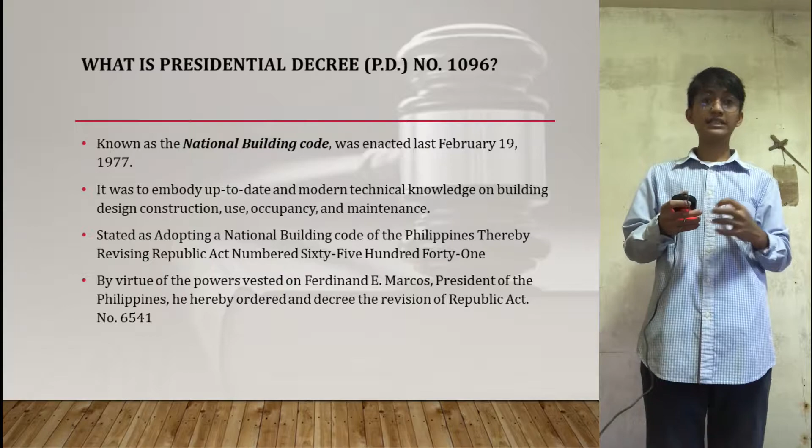So what do you think is the reason why he wants a revision of it? The following are the reasons. First, the country's accelerating economic and physical development, coupled with urbanization and population growth, makes it imperative to formulate and adopt a uniform building code which shall embody up-to-date and modern technical knowledge on building design, construction, use, occupancy, and maintenance.

President Ferdinand Marcos wanted a revision of it because he believed that modern technical knowledge of engineers should be applied in their designs, as we were experiencing urbanization and development.

Second, while there is Republic Act number 6541, entitled 'An Act to Ordain and Institute a National Building Code of the Philippines,' the same does not conform with the development goals and infrastructure programs of the government, and does not adequately provide for all the technological requirements of buildings and structures in terms of up-to-date design and construction standards and criteria.

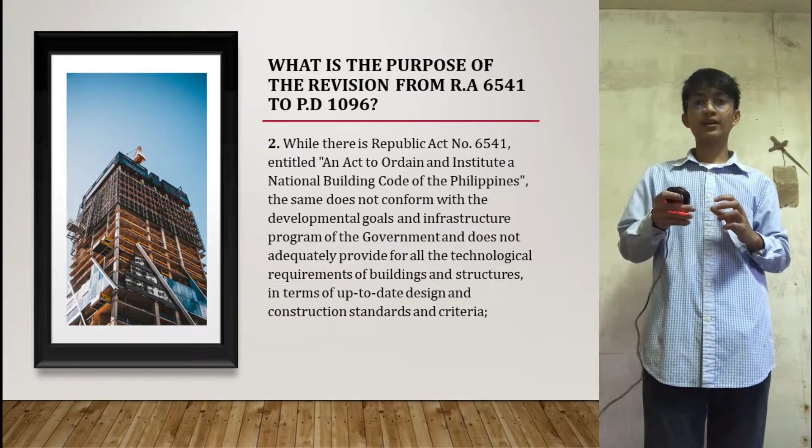This means Presidential Decree number 1096 contains updated and revised terms, considering the applicable advancements observed, to improve upon the previous act. So we should now use this revised version, which is PD number 1096.

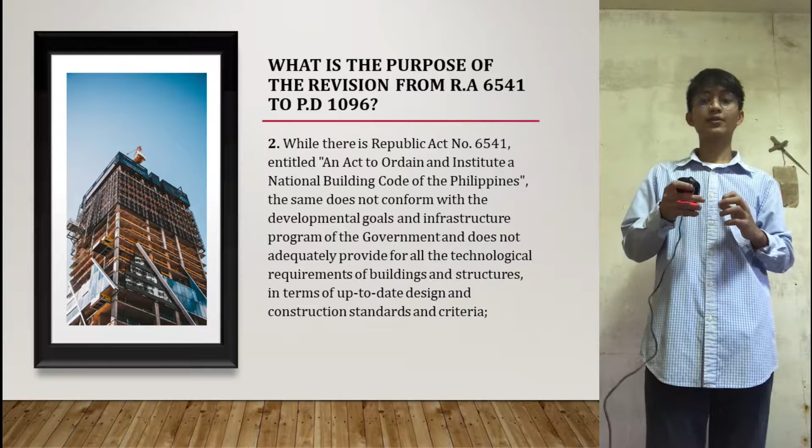Third, in the formulation of the new national building code, it is the desire and policy of the government to avail of and harness the technical expertise and professional know-how of men, not only in the public but in the private sectors as well. This means PD 1096 should be adopted by all professionals doing work related to building construction, both in government and private entities.

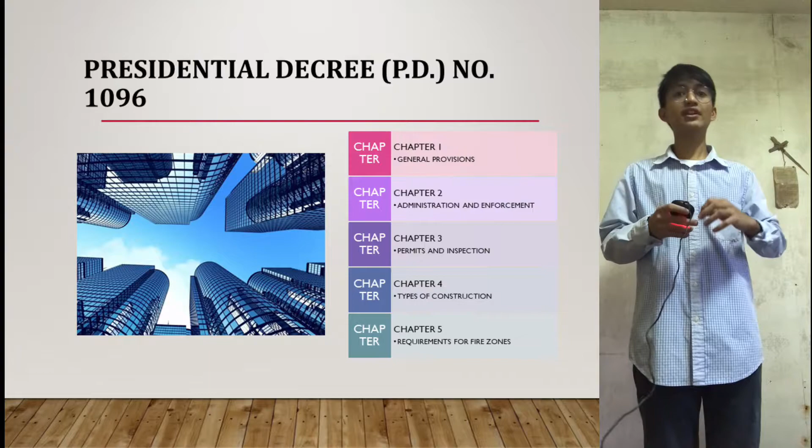Now let's talk about Presidential Decree number 1096, the 5 chapters. First, let's talk about Chapter 1, which is all about the general provisions.

In Section 101, the Title, this decree shall be known as the National Building Code of the Philippines and shall hereinafter be referred to as the Code. In Section 102, Declaration of Policy, it is hereby declared to be the policy of the State to safeguard life, health, property, and public welfare.

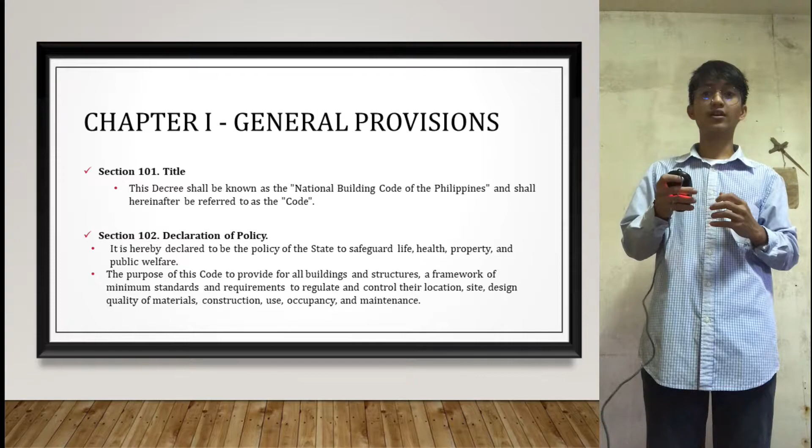The purpose of this code is to provide for all buildings and structures a framework of minimum standards and requirements to regulate and control their location, site, design, quality of materials, construction, use, occupancy, and maintenance. The implementation of this code is for the safety of anybody involved in the construction of a building. This law will monitor the safety of whatever construction is erected. We should always remember that safety should always be considered in construction. Section 103, Scope and Application.

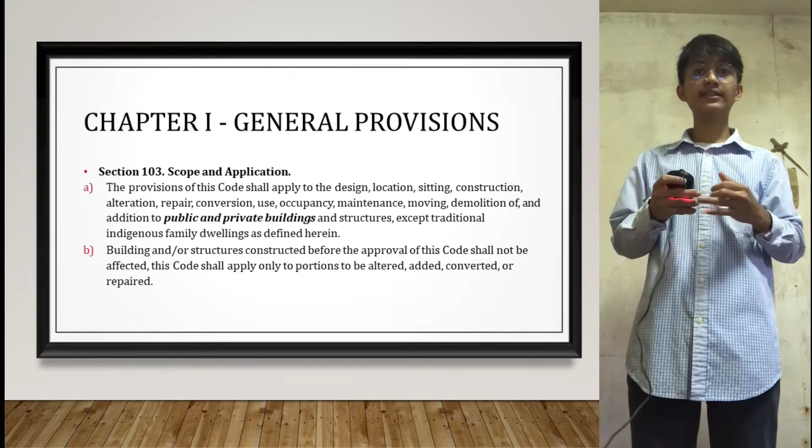So the provisions of this code shall apply to the design, location, siting, construction, alteration, repair, conversion, use, occupancy, maintenance, moving, and demolition of, and addition to public and private buildings and structures, except traditional indigenous family dwellings as defined here. So this law is involved not only in the design and construction of buildings, but also in repairs, demolition, maintenance, and more for both public and private buildings, except for indigenous family dwellings.

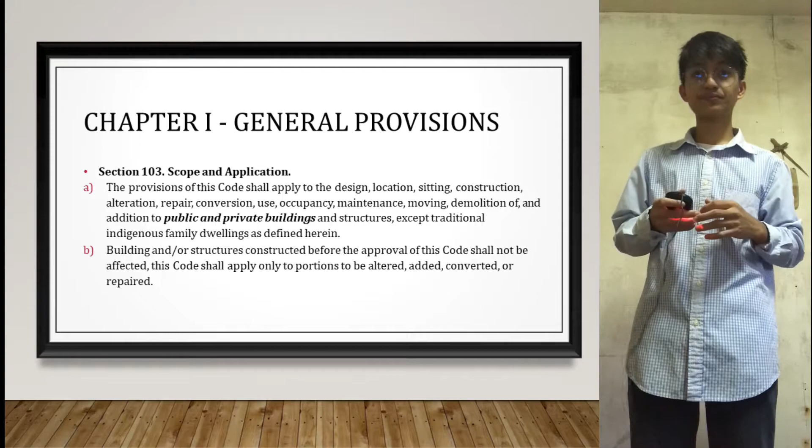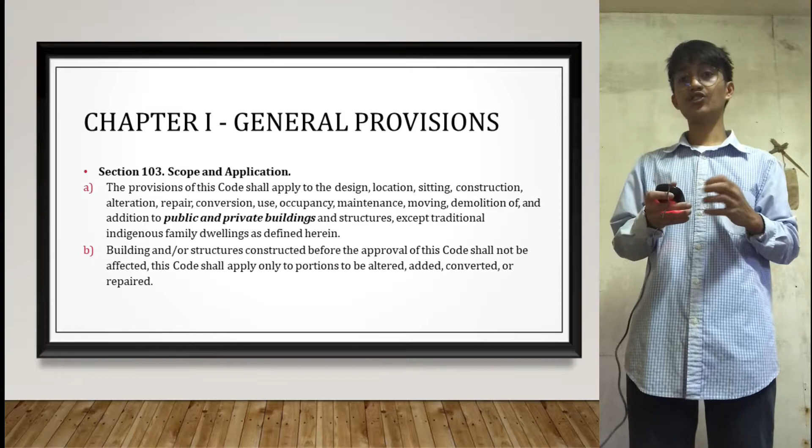Buildings and or structures constructed before the approval of the code shall not be affected. This code shall apply only to the portion to be altered, added, converted, or repaired. So buildings that are about to be constructed or repaired after the approval of this code are the only ones that could be affected, and existing buildings won't be affected. Section 104, the general building requirements.

First, all buildings or structures, as well as accessory facilities thereto, shall conform in all respects to the principles of safe construction and must be suited to the purpose for which they are designed. Next, buildings or structures intended to be used for the manufacture and or production of any kind of article or product shall observe adequate environmental safeguards. And lastly, buildings or structures and all parts thereof, as well as all facilities found therein, shall be maintained in safe, sanitary, and good working condition.

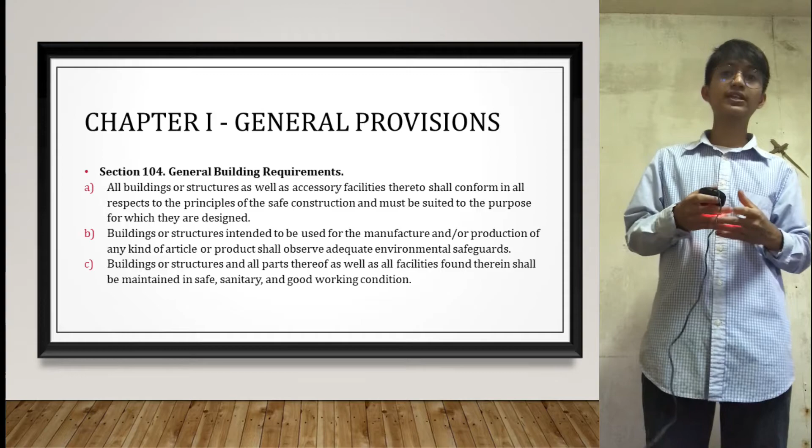So the main point here is to have safe construction of a building. It should have safe, sanitary, and good working condition.

Section 105, Site Requirements. The land or site upon which any building or structure will be constructed shall be sanitary, hygienic, and safe. So not only should the building be hygienic and safe, but also the land or site as well. In the case of sites or buildings intended for use as human habitation, the same shall be at a safe distance from streams or bodies of water or sources of air considered to be polluted. Examples of polluted places are near volcanoes and volcanic sites. Buildings should also be away from potential sources of fire or explosion, as it is not safe in these areas.

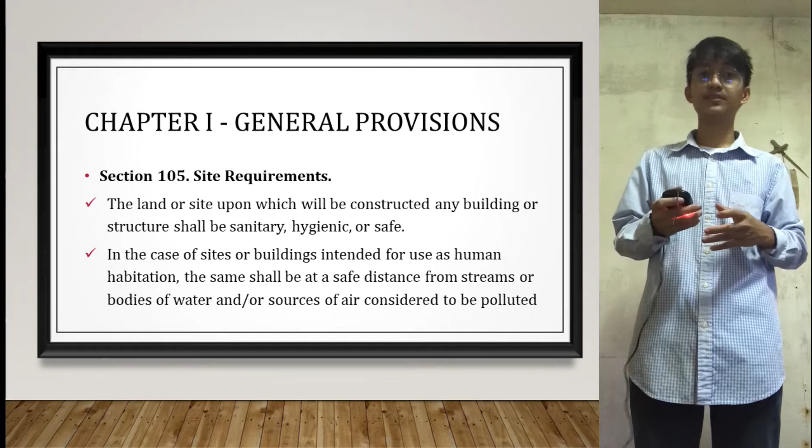Next is Section 106, which is the definition. As used in this code, the words, terms, and phrases enumerated in Annex A hereof shall have the meaning or definition correspondingly provided therein.

So we are done with Chapter 1. Let's proceed to Chapter 2, which is the administration and enforcement. Section 201, responsibility for administration and enforcement. The administration and enforcement of the provisions of this code, including the imposition of penalties for administrative violations thereof, is hereby vested in the Secretary of Public Works, Transportation, and Communication, hereinafter referred to as the Secretary.

Section 202, the technical staff. The Secretary is hereby authorized to constitute and provide in his department a professional staff composed of highly qualified architects, engineers, and technicians who possess diversified and professional experience in the field of building design and construction.

Section 203, the general powers and functions of the Secretary under this code. The Secretary shall exercise the following general powers and functions: First, to formulate policies, plans, standards, and guidelines on building design, construction, use, occupancy, and maintenance. Second, to issue and promulgate rules and regulations to implement the provisions of this code and ensure compliance with policies, plans, standards, and guidelines. Third, to evaluate, review, approve, or take final action on changes and or amendments to existing referral codes, as well as on the incorporation of other referral codes which are not yet expressly made part of this code.

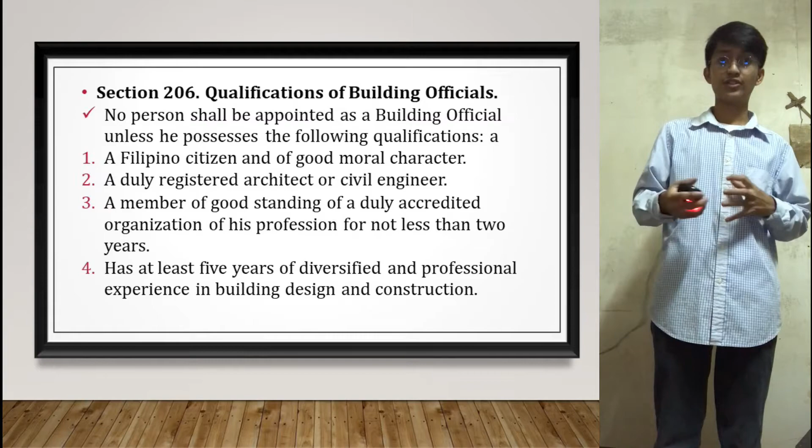Section 207, duties of building official. The building official shall be primarily responsible for the enforcement of the provisions of this code as well as the implementing rules and regulations issued. He is the official charged with the duty of issuing building permits.

So it is mentioned here, the building permit. Before you can construct a building, it should have a building permit.

If construction is started without a building permit, the building official will check your location or site and they will impose fines for not following the rules.

The building official may enter any building at all reasonable times to inspect and determine compliance with the requirements of this code and the terms and conditions provided for in the building permit as issued.

So even if the owner of the construction has a building permit, when the building official checks the construction for compliance and it fails, certain fines will also be expected.

When any building work is found to be contrary to the provisions of this code, the building official may order the work stopped.

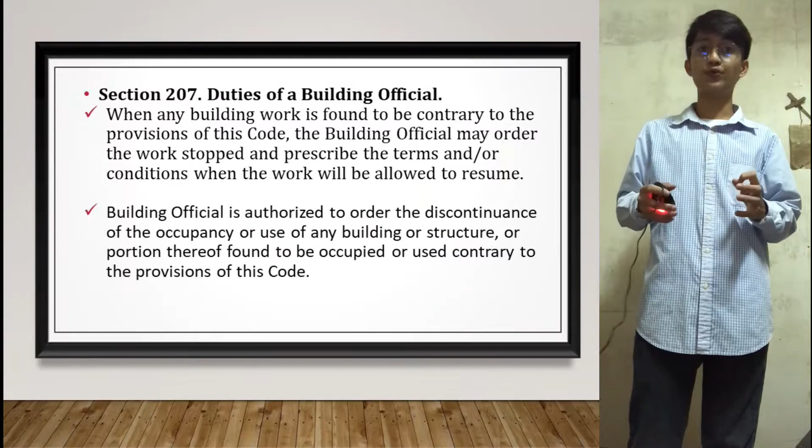The building official is authorized to order the discontinuance of the occupancy or use of any building or structure, or portion thereof, found to be occupied or used contrary to the provisions of this code.

So even if the building has been completed, after checking by the building official, if it is found that it doesn't follow what is stated in the building permit, then the building official has the right to stop

the owner of the building from using it until they comply with what is stated in the building permit.

Section 208 is all about fees. Every building official shall keep a permanent record and accurate account of all fees and other charges fixed and authorized by the secretary to be collected and received under this code.

Subject to existing budgetary, accounting, and auditing rules and regulations, the building official is hereby authorized to retain not more than 20% of his collection for the operating expenses of his office.

The remaining 80% shall be deposited with the provincial, city, or municipal treasurer and shall accrue to the general fund of the province, city, or municipality concerned.

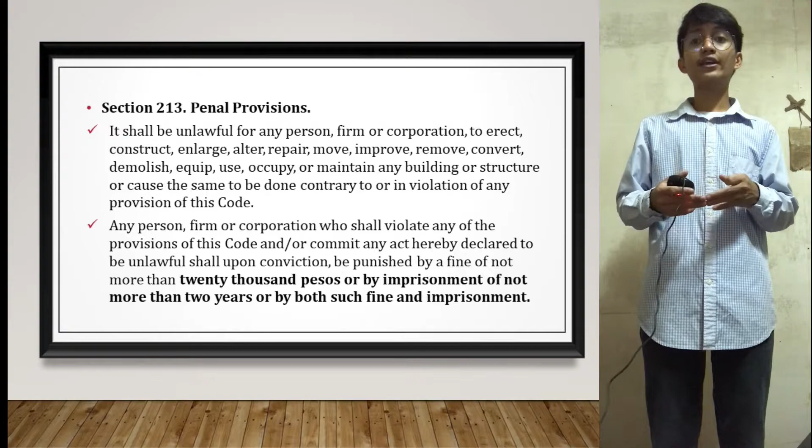Any person, firm, or corporation who shall violate any of the provisions of this code and/or commit any act hereby declared to be unlawful shall, upon conviction, be punished by a fine of not more than 20,000 pesos or by imprisonment of not more than 2 years or both such fine and imprisonment. So the owner of the building or the contractor should always follow the National Building Code of the Philippines. So if you don't want this to happen, let's take time to understand the National Building Code and let's apply it.

Section 214, dangerous and ruinous buildings or structures. So dangerous buildings are those which are herein declared as such or are structurally unsafe or not provided with safe egress or which constitute a fire hazard or are otherwise dangerous to human life. So if the building is not safe to use, then we can declare it as a dangerous building.

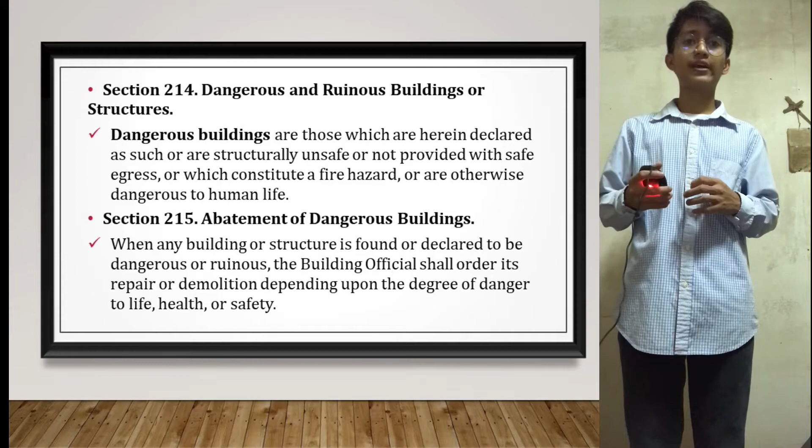So Section 215, abatement of dangerous buildings. When any building or structure is found or declared to be dangerous or ruinous, the building official shall order its repair or demolition depending upon the degree of danger to life, health, or safety. So they will first investigate the building, then they can decide what to do with the building. It's either they will just repair it or they will do a total demolition of it.

So, under Section 216, other remedies. The rights of action and remedies provided in this code shall be in addition to any and all other rights of action and remedies that may be available under existing laws.

So now let's proceed to Chapter 3, which talks about permits and inspection. So Section 301, building permits. No person, firm, or corporation, including any agency or instrumentality of the government, shall erect, construct, alter, repair, move, convert, or demolish any building or structure or cause the same to be done without first obtaining a building permit.

Like what I've said earlier, prior to starting the construction of a building, the owner should always have the building permit first. And they can obtain this building permit from the building official assigned in the place where the building is to be constructed. Section 302, application for permits. So, how can they obtain this permit?

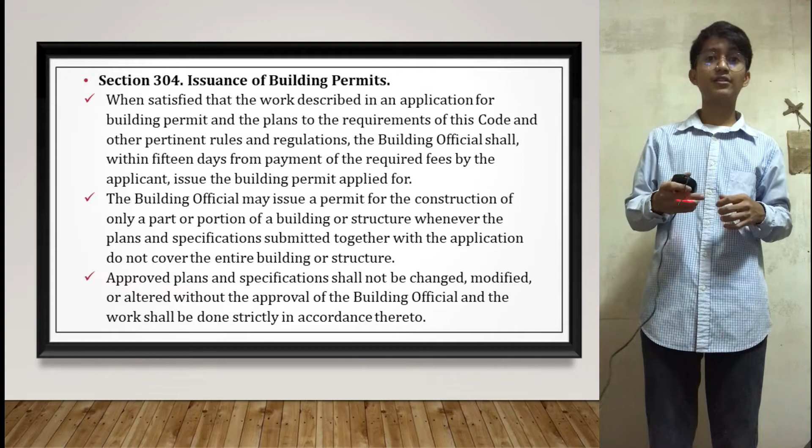The building official may issue a permit for the construction of only a part or portion of a building or structure whenever the plans and specifications submitted together with the application do not cover the entire building or structure. So it means that if your application satisfies all the requirements, then the building official can give you the permit.

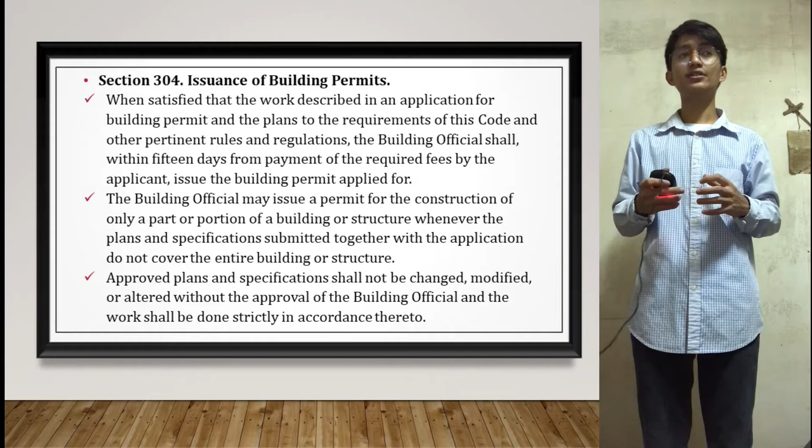Approved plans and specifications shall not be changed, modified, or altered without the approval of the building official, and the work shall be done strictly in accordance thereto. So if your plan has been approved and you want to change something in your plan, you should inform the building official about the changes you've made.

Section 305, Validity of Building Permits. So the issuance of the building permit shall not be construed as an approval or authorization to the permittee to disregard or violate any of the provisions of this code.

A building permit issued under the provision of this code shall expire and become null and void if the building or work authorized therein is not commenced within a period of 1 year from the date of such permit, or if the building or work so authorized is suspended or abandoned at any time after it has been commenced for a period of 120 days.

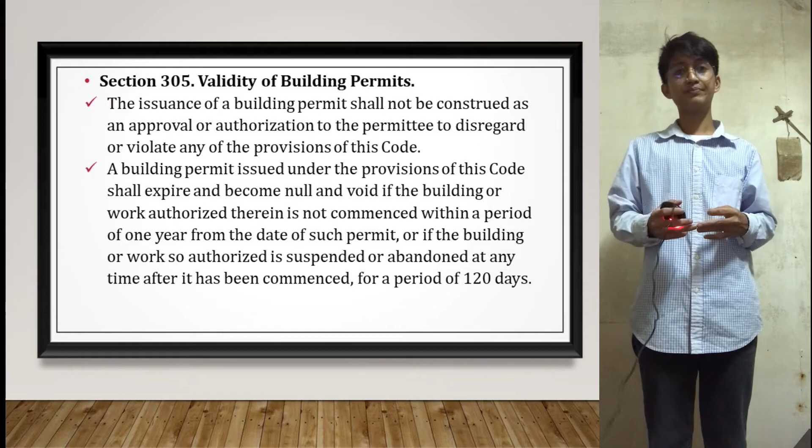So once you get your building permit, you should start the construction, because if you start the construction after 1 year, your building permit will not be valid anymore. So Section 306, Non-issuance, Suspension, or Revocation of Building Permits.

So the building official may order or cause the non-issuance, suspension, or revocation of building permits on any or all of the following reasons or grounds. First is error found in the plans and specifications. Second, incorrect or inaccurate data or information supplied. Third, non-compliance with the provisions of this code or of any rule or regulation. So you should be careful in submitting your application for building permit and avoid these 3.

Notice of non-issuance, suspension, or revocation of building permit shall always be made in writing stating the reason or ground therefor. Section 307, Appeal. Within 15 days from the date of receipt of advice of the non-issuance, suspension, or revocation of permit, the applicant permittee may file an appeal with the Secretary, who shall render his decision within 15 days from the date of receipt of notice of appeal.

So even if you receive a suspension, you still have a chance to file an appeal within 15 days. So Section 308, Inspection and Supervision of Work. The owner of the building who is issued or granted a building permit under this code shall engage the services of a duly licensed architect or civil engineer to undertake the full-time inspection and supervision of the construction.

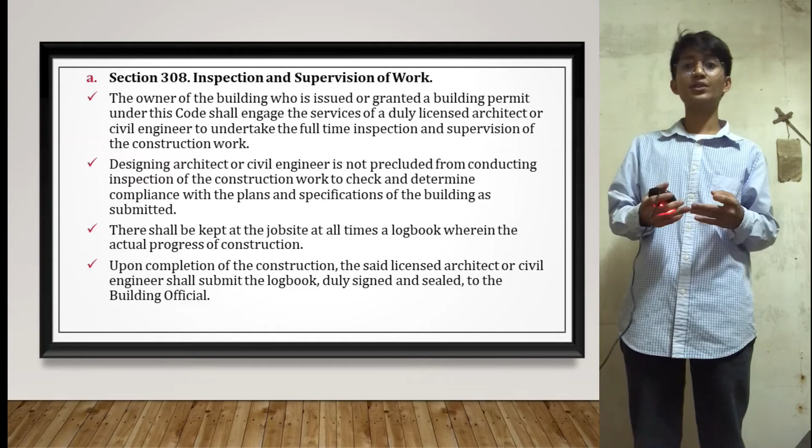There shall be kept at the job site at all times a logbook wherein the actual progress of construction is recorded. This logbook also includes the data on tests conducted, weather condition, and other pertinent data. Upon completion of the construction, the said licensed architect or civil engineer shall submit the logbook duly signed and sealed to the building official. He shall also prepare and submit a certificate of completion of the project stating that the construction of the building conforms to the provisions of this code as well as with the approved plans and specifications.

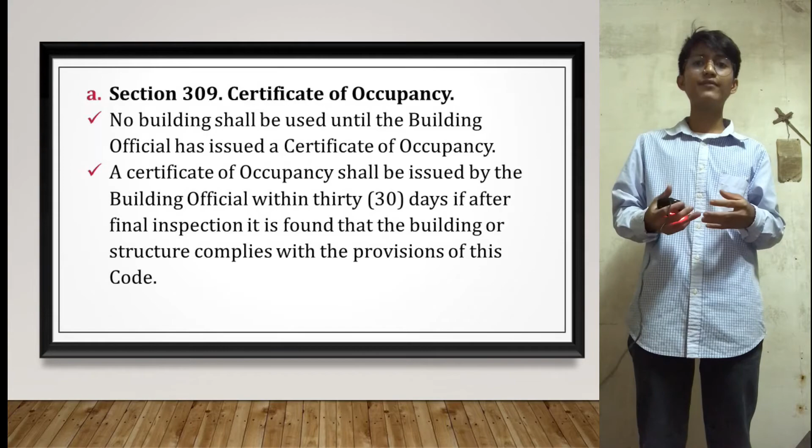Section 309, Certificate of Occupancy. No building shall be used until the building official has issued a certificate of occupancy. A certificate of occupancy shall be issued by the building official within 30 days if after final inspection it is found that the building or structure complies with the provisions of this code. So once the structure is completed, the owner can't use it unless it has a certificate of occupancy. So, if all provisions are complied with, then you can have your certificate of occupancy within 30 days.

So now, let's proceed to Chapter 4, which is the types of construction. So, Section 401, Type of Construction.

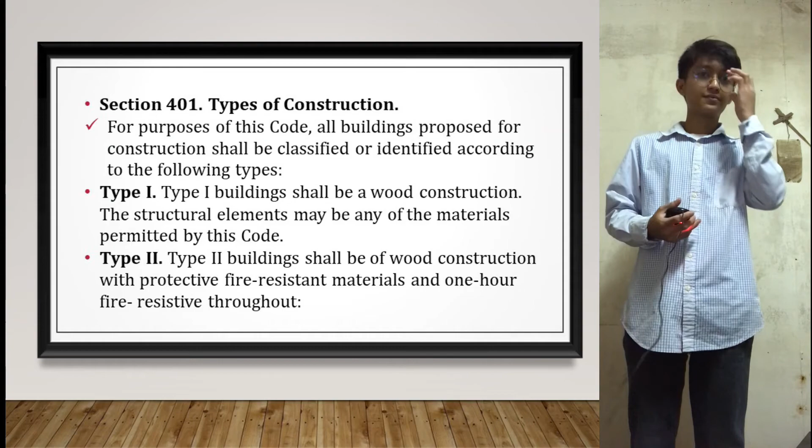For purposes of this code, all buildings proposed for construction shall be classified or identified according to the following type. So there are 5 types. So type 1, building shall be a wood construction. The structural element may be any of the materials permitted by this code.

Type 2, building shall be of wood construction with protective fire resistant materials and 1 hour fire resistive throughout, except the permanent non-bearing partition. So, what is non-bearing partition? So, these are any walls that divide space in a building, but do not carry any vertical load. So, it doesn't carry load.

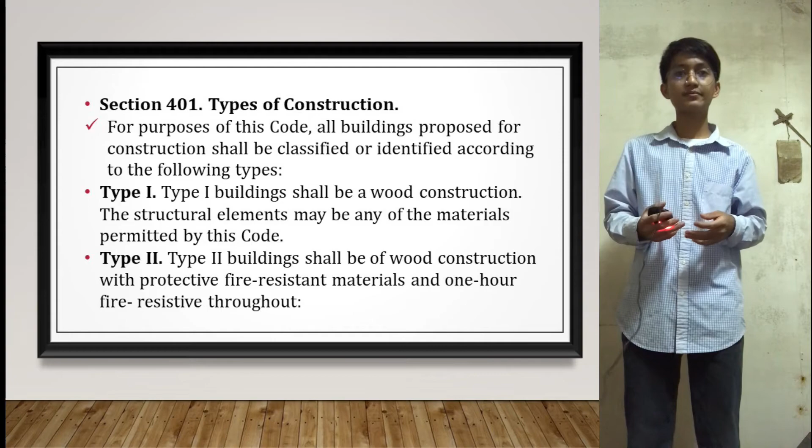So, these non-bearing partitions may use fire retardant treated wood within the framing assembly. So when we say fire retardant, it is a substance that is used to slow down or stop the spread of fire. So the type 3 building shall be masonry and wood construction. Structural element may be any of the materials permitted by this code, provided that the building shall be 1 hour fire resistive throughout. Exterior walls shall be made of incombustible fire resistive construction.

So we talk about the type 1 and type 2 building, and they are all about wood construction. Now in type 3, it is composed of wood and masonry. So the exterior wall should be made of materials that are not easy to burn.

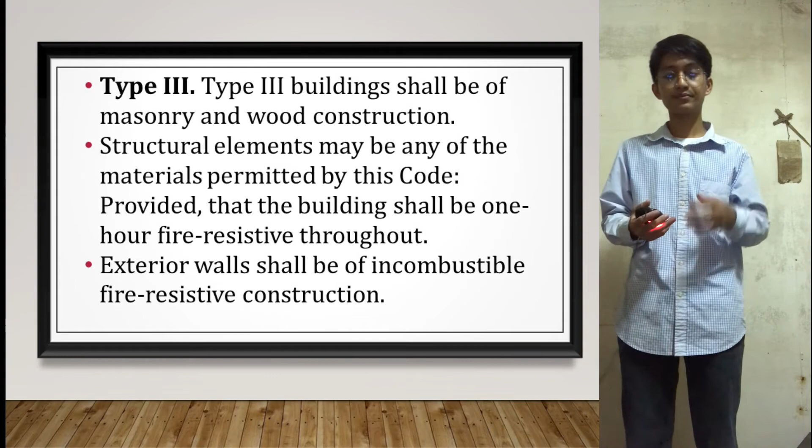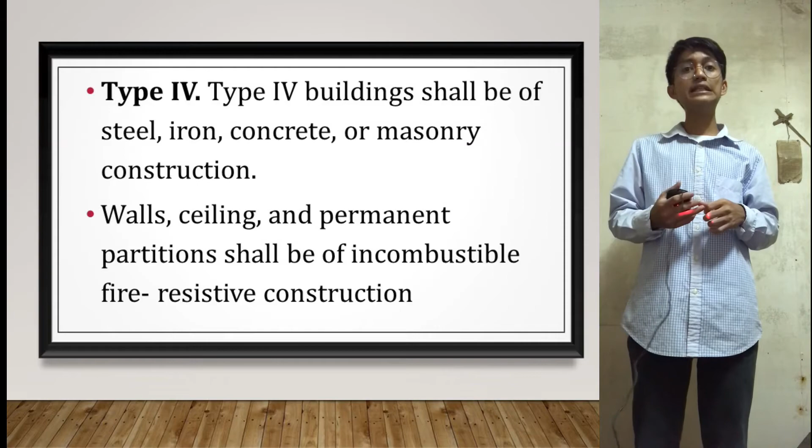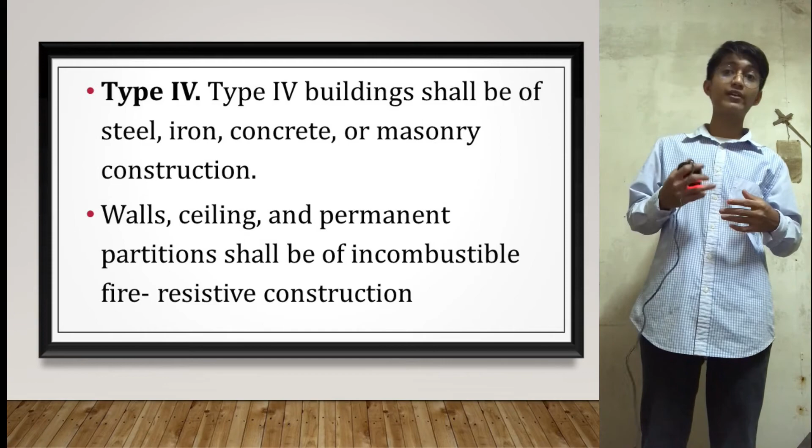Type 4 building shall be made of steel, iron, concrete, or masonry construction. Wall, ceiling, permanent partition shall be made of incombustible fire-resistive construction. Again, except permanent non-bearing partitions may use fire retardant treated wood within the framing assembly.

Type 5, which is the last one. Type 5 building shall be fire resistive. The structural element shall be steel, iron, concrete, or masonry construction. And wall, ceiling, and permanent partition shall be incombustible fire resistive construction.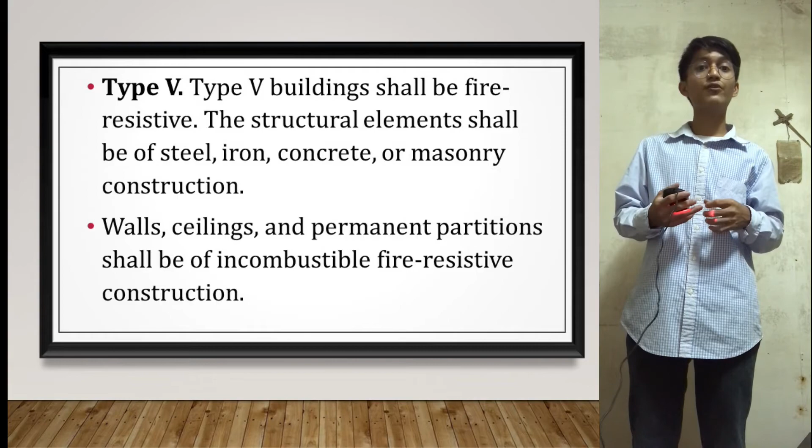Section 402, changes in type. So, no changes shall be made in the type of construction of any building which would place the building in a different subtype or type of construction unless such building is made to comply with the requirements for such subtype of construction, except when the change is approved by the building official upon showing that the new or proposed construction is less hazardous based on life and fire risk than the existing construction.

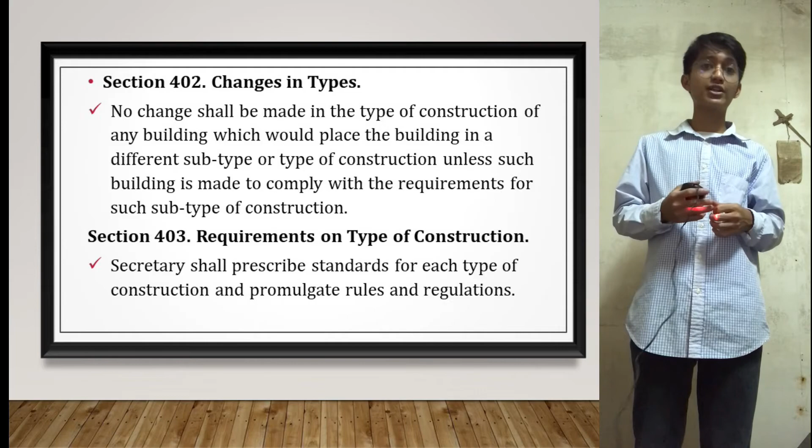So Section 403, requirements of type construction. Secretary shall prescribe standards for each type of construction and promulgate rules and regulations. And for the last chapter, which is chapter 5, requirements of fire zones. So, Section 501, fire zones defined. So areas within which only certain types of buildings are permitted to be constructed based on their use or occupancy, type of construction, and resistance to fire.

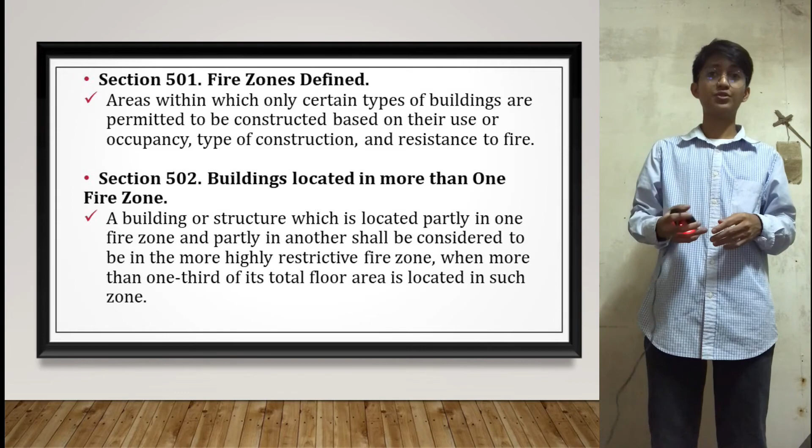Section 502, buildings located in more than one fire zone. A building or structure which is located partly in one fire zone and partly in another shall be considered to be in the more highly restrictive fire zone when more than one-third of its total floor area is located in such zone. So section 503, moved building. Any building or structure moved within or into any fire zone shall be made to comply with all requirements for buildings in that fire zone.

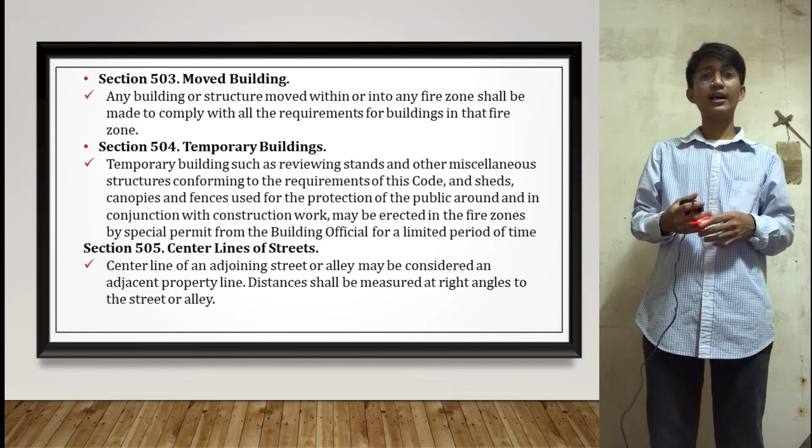Section 504, temporary buildings. So temporary buildings such as reviewing stands and other miscellaneous structures conforming to the requirements of this code, and sheds, canopies, and fences used for the protection of the public around or in conjunction with construction work may be erected in the fire zones by special permit from the building official for a limited period of time. So section 505, center line of streets. Center line of an adjoining street or alley may be considered an adjacent property line. Distances shall be measured at right angles to the street or alley.

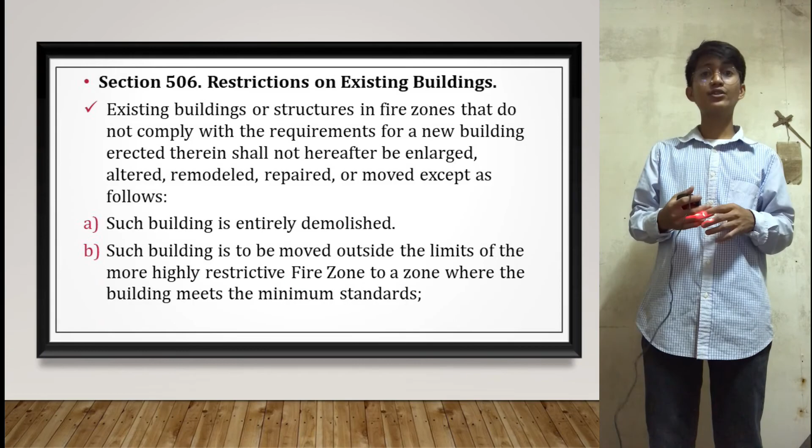Section 506, restrictions on existing buildings. So, existing buildings or structures in fire zones that do not comply with the requirements for a new building erected therein shall not hereafter be enlarged, altered, remodeled, repaired, or moved except as follows. If such building is entirely demolished; if such building is to be moved outside the limit of the more highly restrictive fire zone, to a zone where the building meets the minimum standards; changes, alterations, and repairs may be made provided that in any 12-month period, the value of the work does not exceed 20% of the value of the existing building, and provided that such changes do not add additional combustible materials or, in the opinion of the building official, increase the fire hazard.

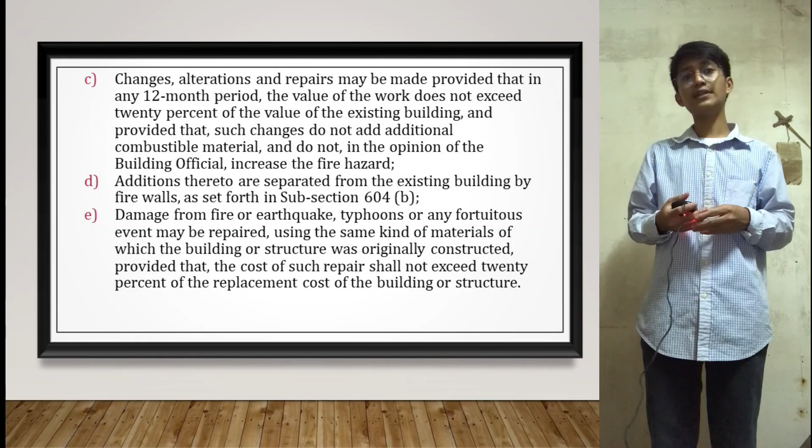Next is additions thereto that are separated from the existing building by a firewall as set forth in subsection 604, and damage from fire, earthquake, typhoons, or any fortuitous event may be repaired using the same kind of materials of which the building or structure was originally constructed, provided that the cost of such repair shall not exceed 20% of the replacement cost of the building or structure.

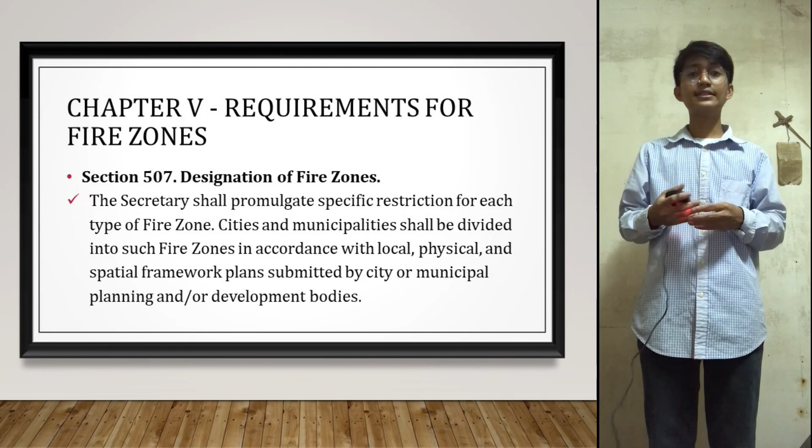And Section 507, designation of fire zones. So the Secretary shall promulgate specific restrictions for each type of fire zone. Cities and municipalities shall be divided into such fire zones in accordance with local, physical, and spatial framework plans submitted by city or municipal planning and/or development bodies.